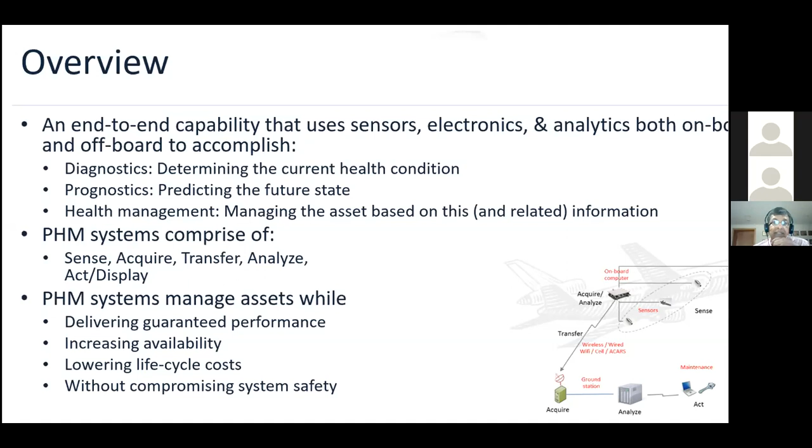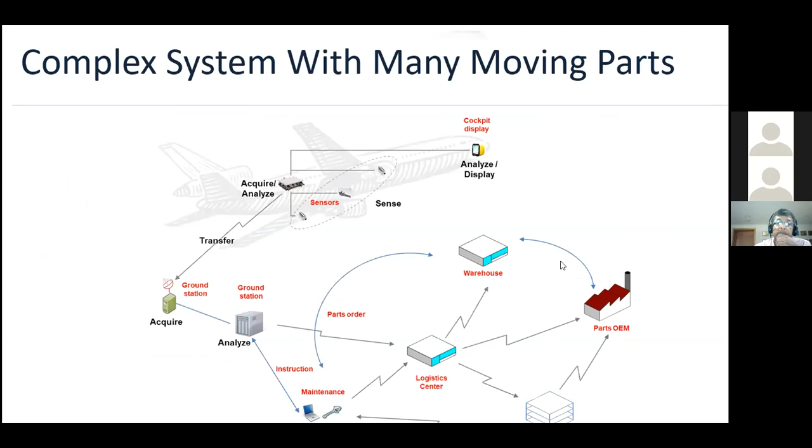As you all know, aerospace infrastructure, the ecosystem is very complex. You have not just the flying asset, but you also have an entire infrastructure and enterprise that backs it up. So the PHM model lies within this bigger system that actually supplies parts, supplies information, analyzes information. There's the logistics associated with it, there's engineering associated with it, etc.

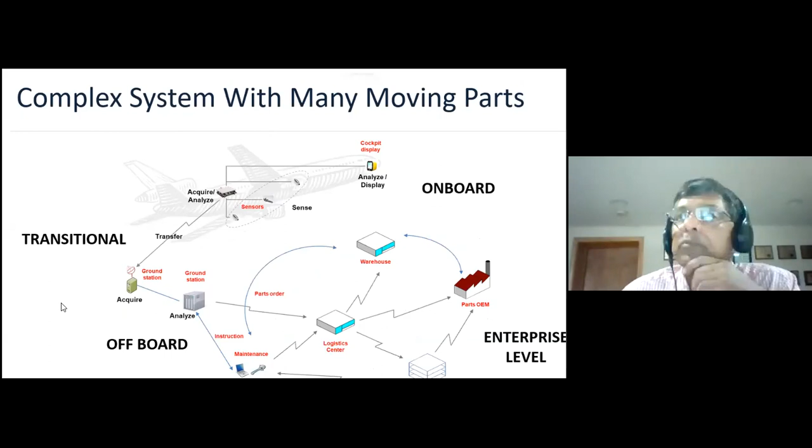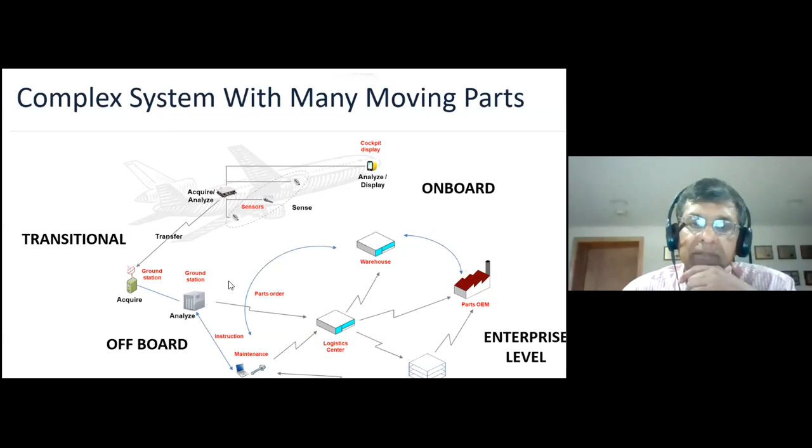So there are several pieces of this, as I mentioned. There's the onboard piece, there is the transfer piece, and that's becoming more and more important these days, especially with cybersecurity and other things that are influencing not just the aerospace sector, but the entire mobility sector. There is the offboard piece, where the transitional information gets downloaded, and then you do things on the ground. And then based on the actions, there is this entire enterprise level, the functions associated with the enterprise.

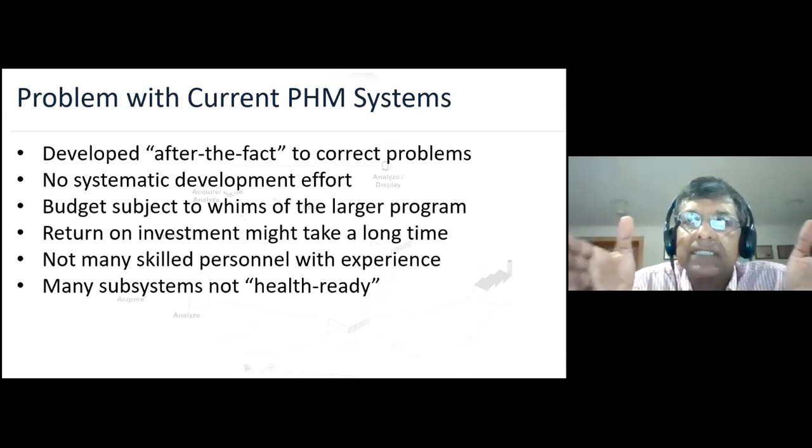What are some of the problems with the current PHM system? It's not typically part of the normal engineering design process. It's part of after the fact to correct the problems. I know a lot of you have experienced this, especially if you're in this field. And therefore, because of this, there's no systematic development effort upfront. A lot of it is after the fact.

Budgets always get cut when the larger program runs out of funds. The ROI on this takes much longer than for a normal aircraft. An aircraft program takes a long time anyway to make money, but the PHM systems takes even longer. And while this is no longer that true, there aren't people who are actually trained in the discipline of PHM. That's changing, but not fast enough, I think.

And systems are not health ready. In other words, they are not designed from the beginning to be installed in a PHM ecosystem.

Well, part of the solution to this, obviously systems engineering is a big part of it, but also a dedicated team, protected budgets, shorter term off-ramps. In other words, you want wins that don't take 35 years to get realized. And again, I must emphasize that training is a big part of this. And standards is another thing which I've been involved in a lot, which also comes into making PHM a success.

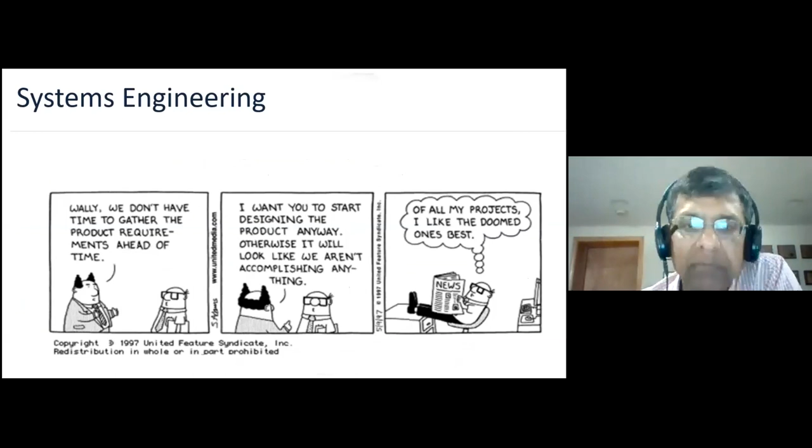So how does the systems engineering part of it work? You've seen this cartoon, I'm sure. Essentially, we all know, and since you are all members of INCOSE, you do know that systems engineering is a big part of it and is a big important part of any design process. That's no different for PHM.

The costs obviously go up exponentially if you have to make changes in a program down the road. That is true of any major program. It's certainly true of programs that involve aerospace, for sure.

And I don't know if there was a PhD thesis in Australia, I'm forgetting the name of the author, who actually did an analysis and figured out that if you spend about 15% of the budget in a program on systems engineering activities, the reduction in cost and schedule is fairly significant. So that's something that obviously you won't do it for a 2-week project, but a major project, if you fund it properly, you're going to get a better return on investment.

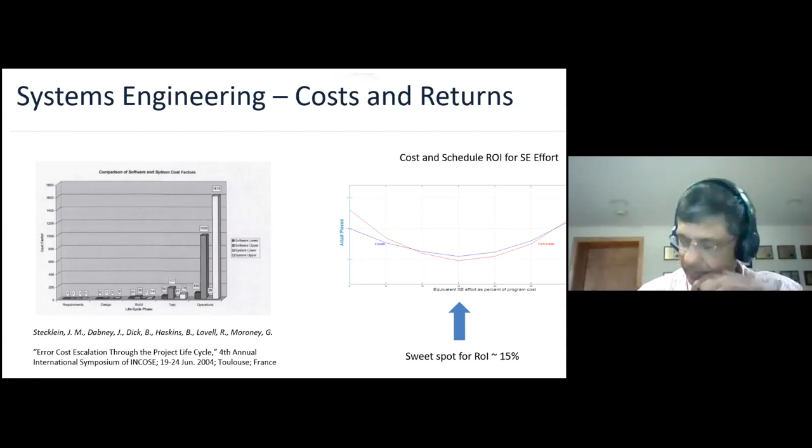Okay, I'll give you, at least to motivate this, an example of where the lack of a systematic approach to the design of PHM systems actually came back to bite an OEM. So there was a problem in a certain aircraft engine company's engines, where there was a problem with the fan blade retention. I won't go into details.

So there was a retention problem of the fan blade, and one of the issues was that it would come loose, and they realized that they had a vibration system in place that would give very clear indication of the fan blade coming loose early if you analyze the system. So you could take the vibration information, you could download it, analyze it, and trend it, and it was very clear that you could pick up this problem.

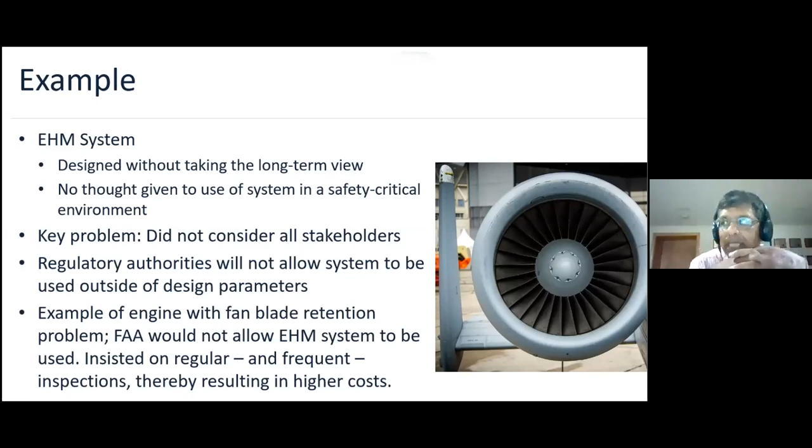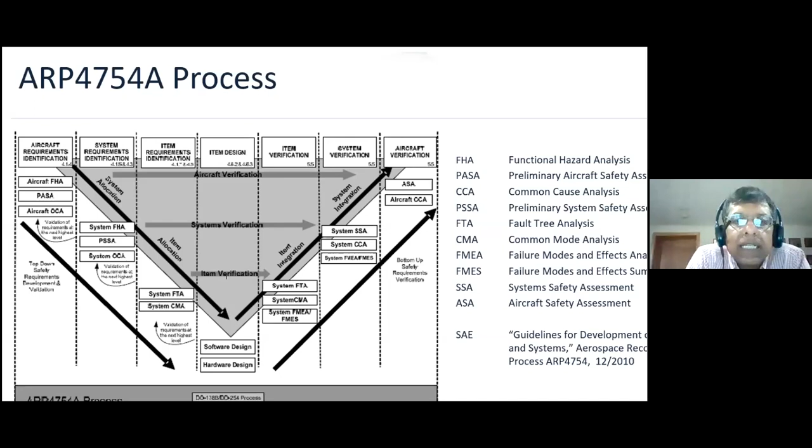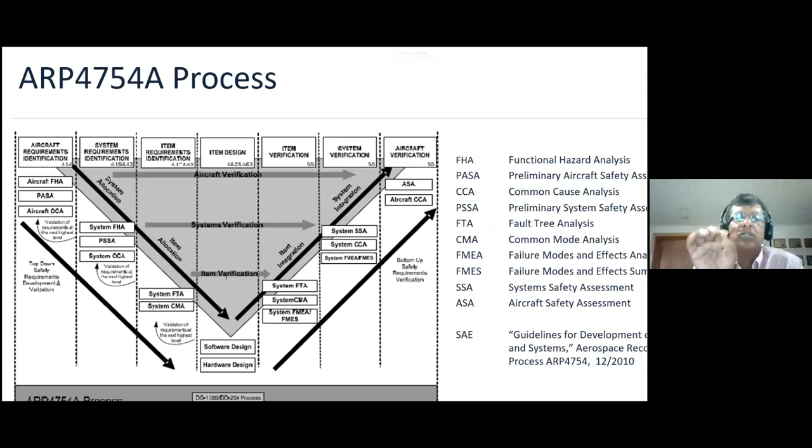A lot of you are aware of the ARP 4754 process, which is the systematic systems engineering approach that has been translated to the aircraft certification world. What we are trying to do within the PHM discipline is adapt our systems to this overall process. There are certain key differences between the two. One obvious one is that ARP 4754 is only for airborne systems, whereas what we design is very much an end-to-end process that involves onboard components as well as off-board components. So we have to adapt the system to our discipline and programs, but within the context of this kind of systems engineering process.

So one of the applications of systems engineering to PHM, as Partha mentioned a little in the beginning, is the cost benefit analysis. This is key in every program I've been involved in. Some of you may be part of UTC, or now Raytheon. A major program when I was at Pratt & Whitney was the geared turbofan, and I'm quite proud to say that using a fairly validated cost benefit analysis, we managed to get EHM, engine health management, into the geared turbofan from the very beginning. That's an extremely important part of this. People don't believe that PHM makes you any money, so you have to be really careful about this.

Obviously the rest of it you know very well: requirements management, architecture definitions—I'll go through some examples relating to PHM. Model-based design is a huge part of PHM these days; almost everything we do today is model-based. Associated with that is model-based analytical verification and validation as well. The key to PHM is really how it integrates with the MRO, maintenance, repair, and overhaul business. That's the only place you can make money with this. So I'll talk a little about where we are going with this in the near future.

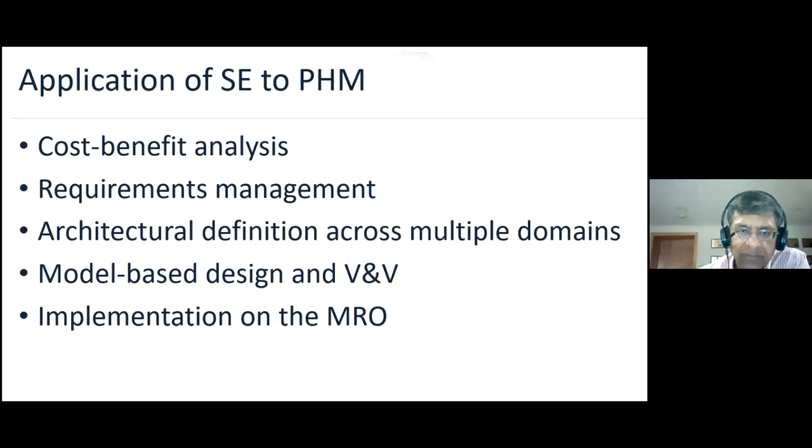Requirements—this is interesting. You all know that requirements flow down from higher level objectives, right? That's what we've all been taught within our systems engineering discipline. In this case, this has been pulled straight from the JSF, Joint Strike Fighter, requirements document—or rather, this is not a requirements document, this is the very high level needs statement: affordability, redundancy, and keeping the same level of safety.

I don't know if you know what the JSF is. The Joint Strike Fighter is the 5th generation fighter replacement for a twin engine fighter, which is sort of the F-22. The F-35 was single engine, and the requirement was that it would maintain the same level of safety as something with 2 engines, which is huge. So having a single engine aircraft, the PHM system was a basic requirement for obtaining the same level of safety as the F-22.

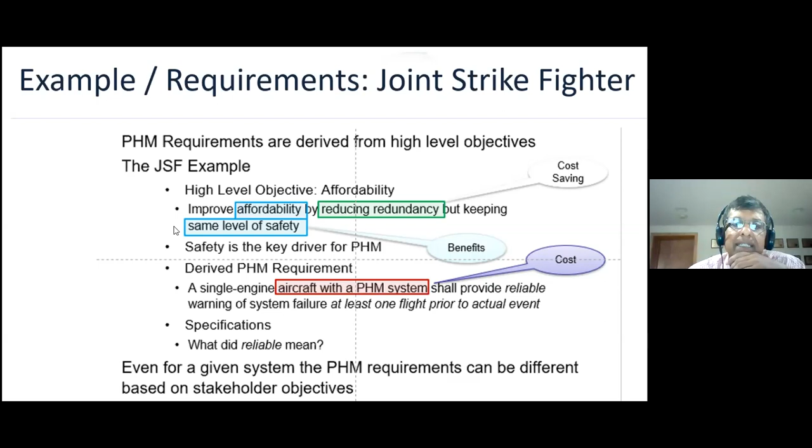So that's how you derive requirements from higher level needs statements that, on the face of it, you don't realize are there. Given this, you really don't see where the PHM comes in. But thanks to some leadership within NAVAIR, a lot of PHM functions came about from the JSF because of this need. So that's just an example of how requirements get derived from the needs statement.

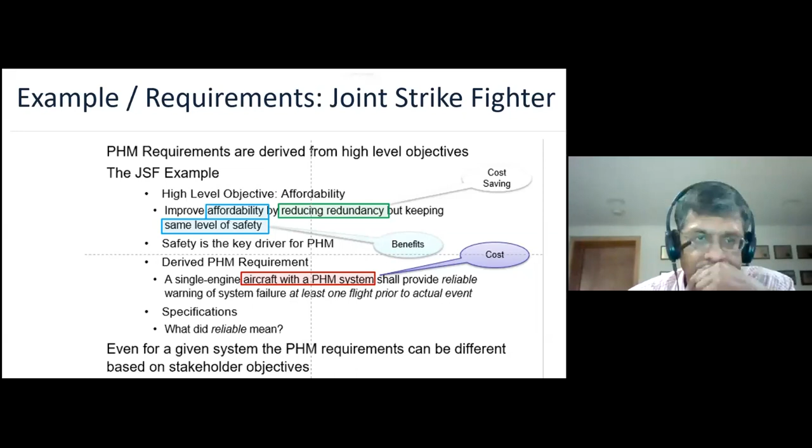I talked about the OSA CBM model, which is on the left, and the SATAA model, which I described—sense, acquire, transfer, analyze, and act. I don't know if you know what the OSA CBM model is. Obviously, CBM is condition-based maintenance.

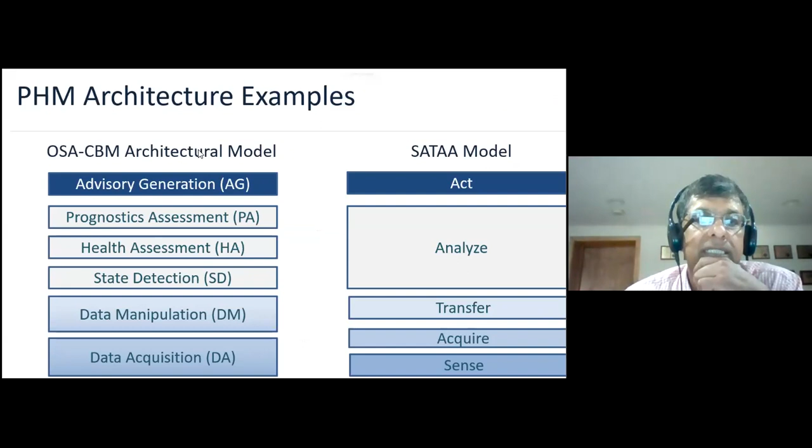Open system architecture's condition-based maintenance architectural model, this is by Mimosa, that was started by the US Navy along with, I think, Collins or Hamilton Sundstrand was a big part of that. Nobody knows what Hamilton Sundstrand is anymore.

Anyway, so they have this 6-level model: data acquisition, data manipulation, state detection, health assessment, prognostics assessment, and advisory generation, which lines up, well, it doesn't quite line up with our 5-state model, but you can see some parallels between the two. This is an architecture of the PHM system that we use pretty much on all our documents, the documents that Partha was talking about within the ARPs that the SAE aerospace sector has been developing.

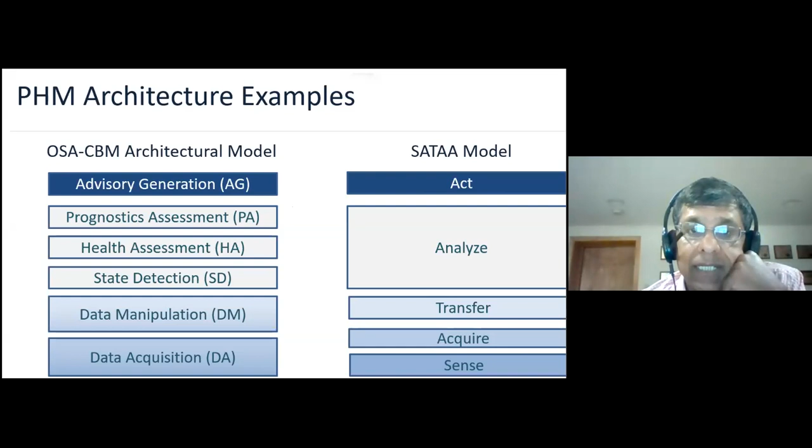I talked a lot about model-based design. Gas path analysis is a key part of engine health management. I talked to you about the geared turbofan. This is a key component of that.

So what a model-based design system for engine health management consists of is, if you have identified these physical problems like erosion, corrosion, fouling, etc., what happens because of that is it results in degraded component performance. The way we assign those performances in the gas turbine is essentially by two major factors: efficiencies and flow capacities, which essentially means it's the area of the flow within the turbine.

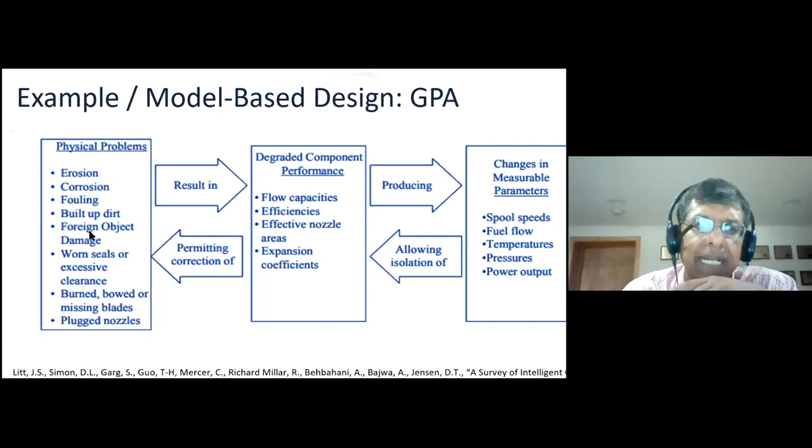And what the degraded component performance does is produce some changes in measurable parameters. This is what you're sensing. So everything we do within diagnostics or PHM is an inverse problem. Taking the measured parameters and analyzing it using model-based means allows us to estimate the degraded performance characteristics. And from that, and from the signatures associated with that, you can actually do the correction to the problem. You can identify and correct the problems.

And a lot of work has been done on this by NASA Glenn Research Center, GRC, and Don Simon is one of the leading players in this area.

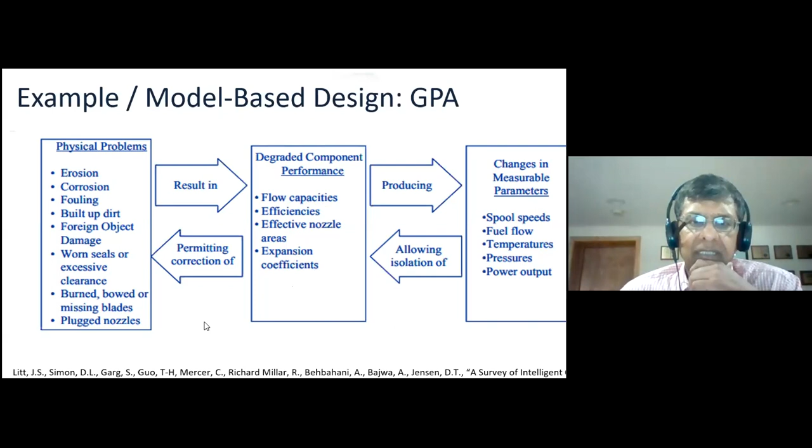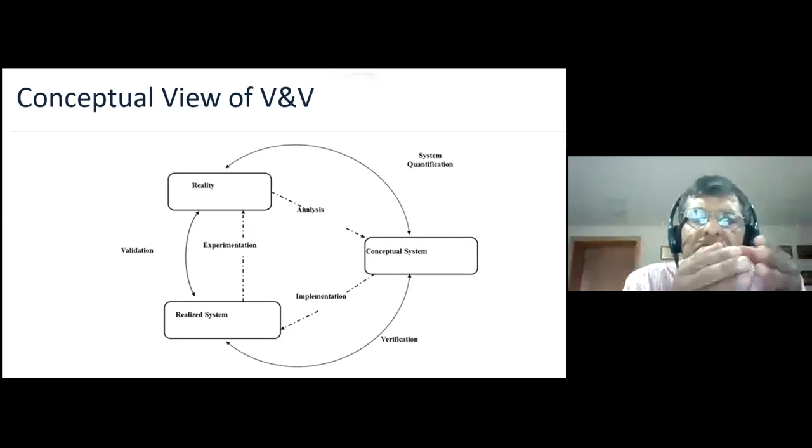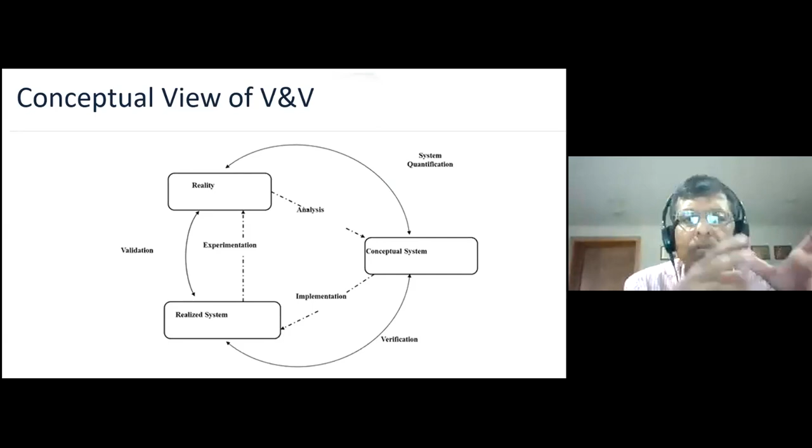I wouldn't bore you with verification and validation. I think that's important, but the only thing I would say is model-based validation of requirements is becoming a big deal. In the PHM world, validation becomes very difficult. If I tell you that I will save you 20% in your life cycle costs, you're not going to wait 30 years to realize that. You have to do it with model-based design or model-based simulation, or some means of doing it analytically. That's the key, that's the only thing I want to comment here.

And then I think what is important for us is to see what the future of this is. Systems are becoming more complex, clearly. And as you all know, systems engineering is an absolutely essential part of developing a complex system.

PHM, by its very nature, is interdisciplinary. It cuts across all the disciplines within, well, in our case, aerospace engineering, but it's the same thing for mobility, automobile, or any other, even manufacturing. A lathe has interdisciplinary aspects, maybe not as complex as an aerospace system, but it certainly has electrical, mechanical, and chemical parts of it that have to be taken into consideration.

And past experience will be key to sustaining PHM in the future. In other words, how things have worked in the past will have to be used to validate the future, especially when it comes to cost-benefit analysis.

So what I would like to do is conclude with my vision of where this is going. I think I've got about 10 minutes, and I can finish that in 10 minutes, or maybe even less. And then we'll open it up for questions.

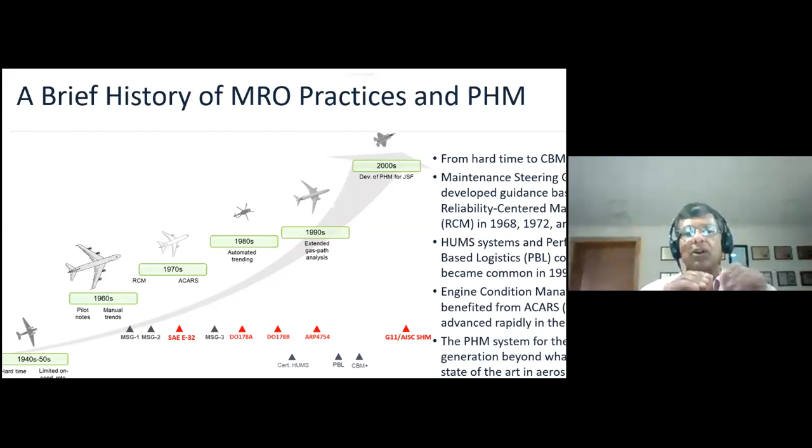So here's, maintenance, repair, and overhaul is kind of where PHM really resides. Why do I say that? Even though it has all aspects of engineering associated with it, it really makes money when you apply it to MRO. It's in the maintenance area that all these analyses, all the algorithms, everything we do ultimately results in maintenance. So it is important to look at the maintenance part of it and then work backwards.

In the commercial aerospace world in the 60s, when the 747 was coming on board, what is now called the Airlines for America group set up the Maintenance Steering Group, MSG, to develop systematic maintenance practices based on reliability centered maintenance. There were 3 versions, called MSG 1, 2, and 3. These were guidance based on reliability centered maintenance, especially for doing maintenance for the 747, and that has evolved over the years.

Every 3 years there's an update on the MSG guidance. The only reason I mention that is we believe that any maintenance related to PHM will have to come in through that MSG process.

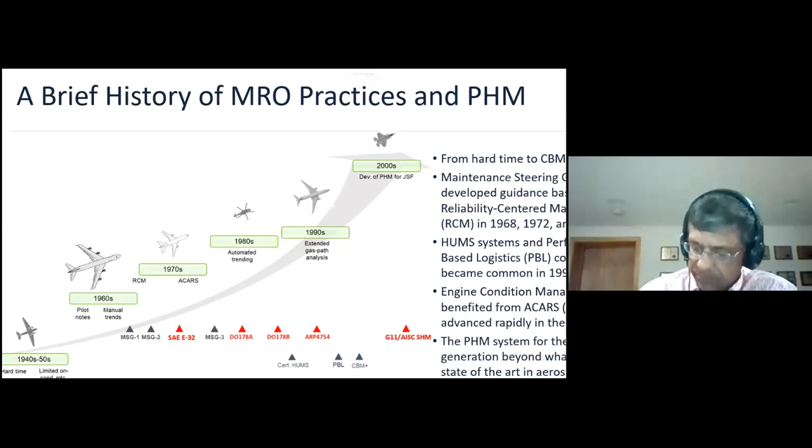What is going to happen in the future? More electric aircraft - there's a huge development, what is now called sort of the fourth revolution in aerospace, which is the electric aircraft, autonomy, urban air mobility. All of these things are coming about. We're going to see huge development through the 20s and into the 30s. I know we've had a bit of a downturn thanks to this COVID crisis, but I don't think that will last. I think it will pick up.

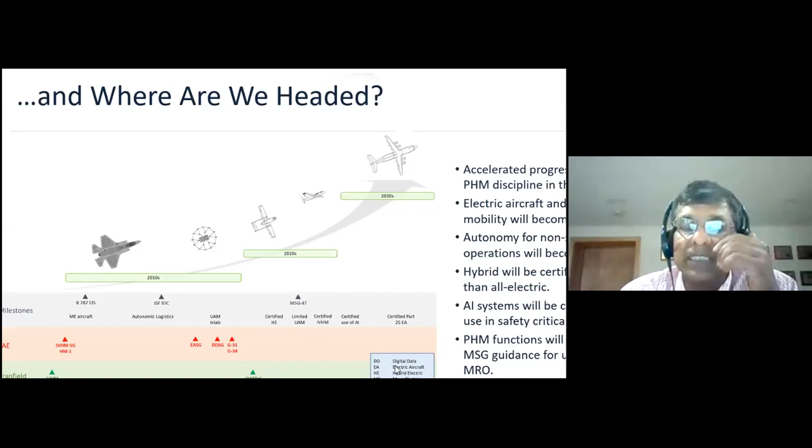It'll be a little slower, but we will get to a certified Part 25, which is a transport big aircraft, by maybe the end of the 30s - that's at least my prediction. We already have a certified small Part 23 electric aircraft today in 2020, so it shouldn't take that long to get to Part 25.

On the SAE side, a lot of work was done at the beginning of this, in 2011, establishing the IVHM steering group, which, by the way, I'm now the chairman of, just starting, and HM1, which is the IVHM technical committee. I think some of you are working on some documents. I know Partha and Prasanna are related to HM1, so that's fantastic.

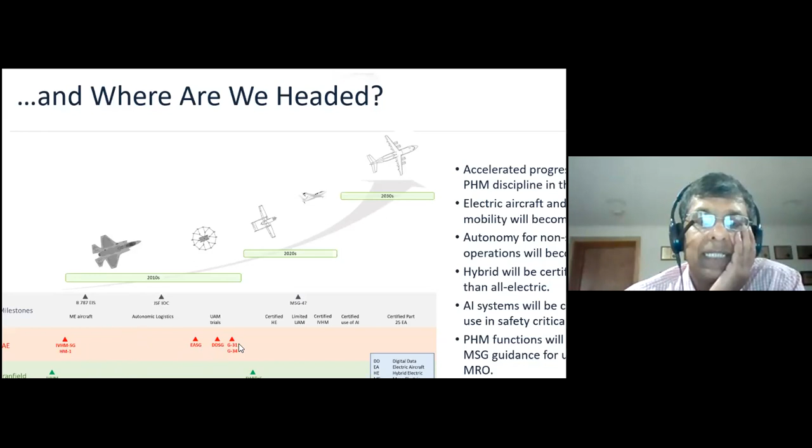I need more people from the Indian aerospace community to join this. Ravi Kumar from Infosys has been doing a lot of work, and it will be great if more people join in. The electric aircraft steering group came about in the last decade. There's also the Digital and Data steering group, G31 and G34. G31 is electronic transactions in aerospace, and Ravi Kumar is actually the vice chair of that group. One very exciting new development within aerospace is G34, the technical committee working on AI in aerospace - artificial intelligence in aerospace.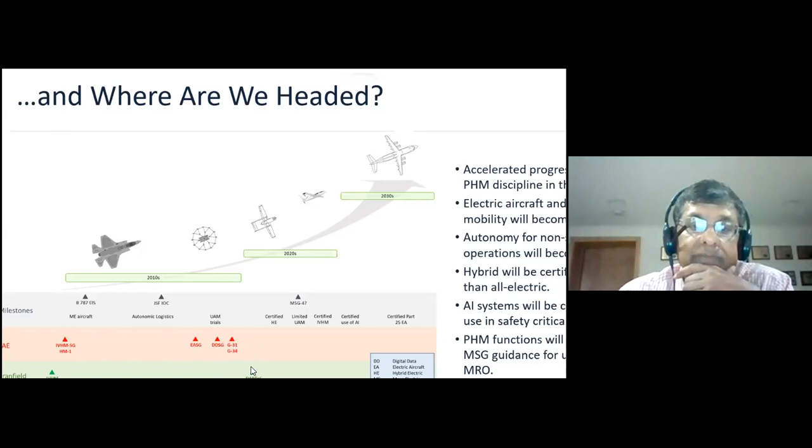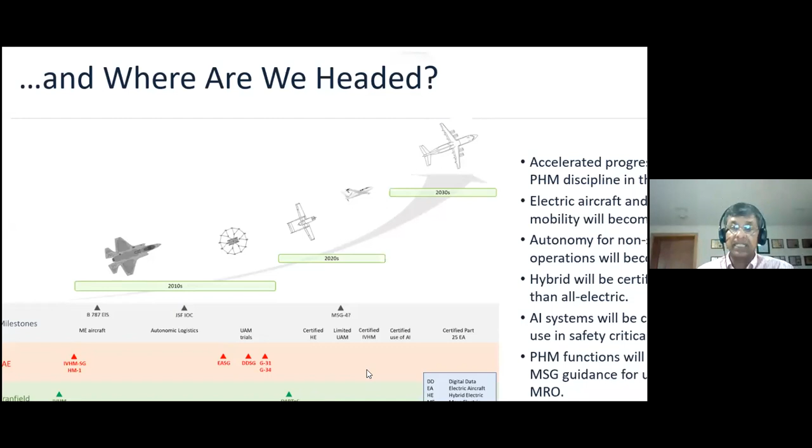That's pretty exciting new development, so I'm happy to be part of that, and I'm sure you're going to hear a lot more about that. Cranfield University has been doing a lot in this area. They set up the IVHM Center in 2009, and now they're setting up the Digital Aviation Technology Center there to work on digital issues related to aerospace, which I think is the future for us. One of the things is how do you get PHM into the MRO.

The maintenance infrastructure? You do it through what are known as maintenance credits. If you look at the definition of maintenance credits within the aerospace context, it is approving a new or modifying an existing maintenance procedure using IVHM or PHM technology in such a way as to save costs without compromising continued airworthiness. It's not earth-shattering what we are trying to say here.

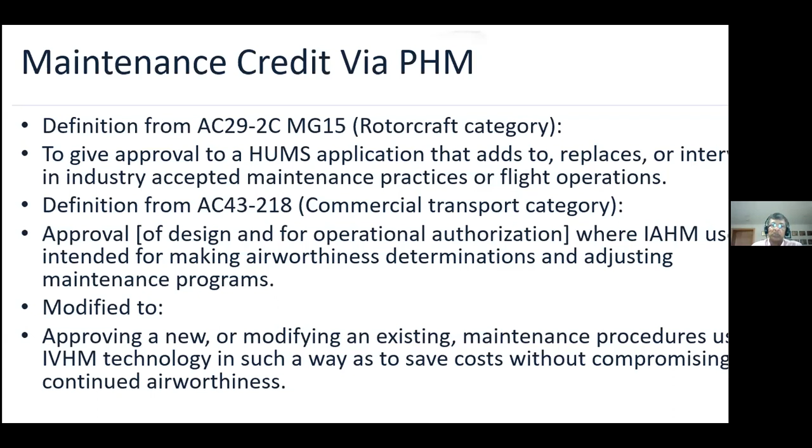Essentially, what we are saying is you look at an existing maintenance procedure, and by the use of IVHM or PHM technology, if you can change it—say you lengthen the inspection interval, or you eliminate a specific procedure—so that you save costs without in any way compromising airworthiness, that's essentially earning maintenance credits for your procedure. That's how we, I believe, go about getting PHM into the aerospace world officially.

There are certain things that are already earning maintenance credits, like vibration monitoring, takeoff EGT margin—EGT is exhaust gas temperature margin monitoring, which is related to ETOPS, twin engine operation. Oil debris monitoring, and a few rotorcraft safety critical parts like main hub rotor, and also the gearbox, are under certain limited maintenance credits programs, not all though.

SHM, the AISC SHM group that I was talking about, is doing a lot in this area, and they're working with the MSG group to do it. In the future, brakes and tires, batteries, APUs, landing gear components—all of them will be attacked or addressed through the maintenance credits procedure. I think that's the key to getting PHM to make a difference in the MRO world.

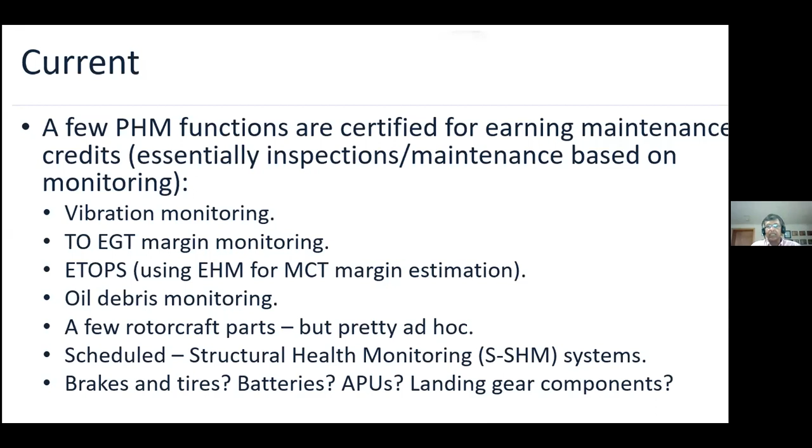This is kind of the process for getting this into the MRO world, and I'll give you a very brief overview of what happens. The maintenance review board, composed of authorities—FAA, EASA, DGCA, etc.—operators and OEM, they get together and figure out how a maintenance program is essentially established.

That goes into the maintenance review board report, which starts the maintenance plan, which then goes to the OEM that develops the maintenance planning document. And then they hand that over, along with the aircraft, the asset, to the operators, who then come up with the detailed maintenance manuals—a big document that actually tells you which bolt to go unscrew to actually get to the problem. And then once problems are found during operations, that goes back and modifies this. So that's how you get engineering changes, etc.

So this loop is complete. And then there is this International Maintenance Review Board Policy Board, which keeps looking at this process and develops procedures for the rest of the world. Now, DGCA is not part of this yet—I don't know why—however, they do take guidance from them down the road. So I'm hoping that India becomes part of this process in the future.

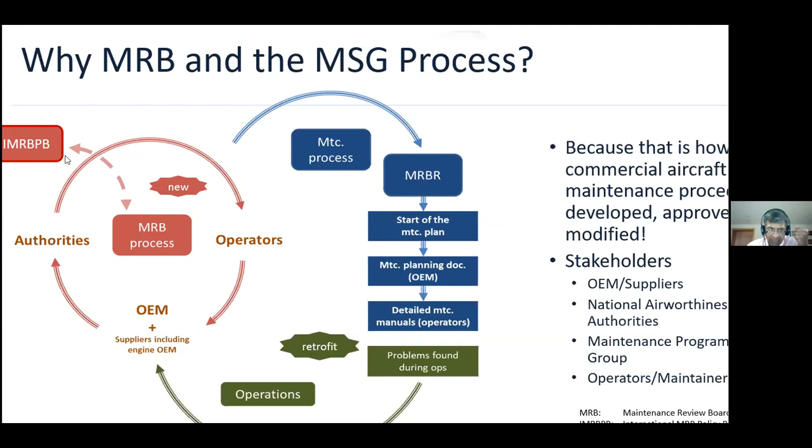I talked to you about systems engineering being critical to a multidisciplinary process such as PHM. About 15% of the budget, if it goes into this for a big project, really brings dividends. Certainly the Defense Department within the US, and I'm sure that is true of India as well, will not undertake a major program without well established systems engineering. Standards are extremely critical, and I know some of you know that.

To conclude, I would say that the only way to get PHM to make a difference is through this maintenance credits process. That's the clear way of doing it, and we are working towards that. Certainly, if you guys are interested, just let me know and we will include you in the process. Thank you, I guess I'm open to questions.

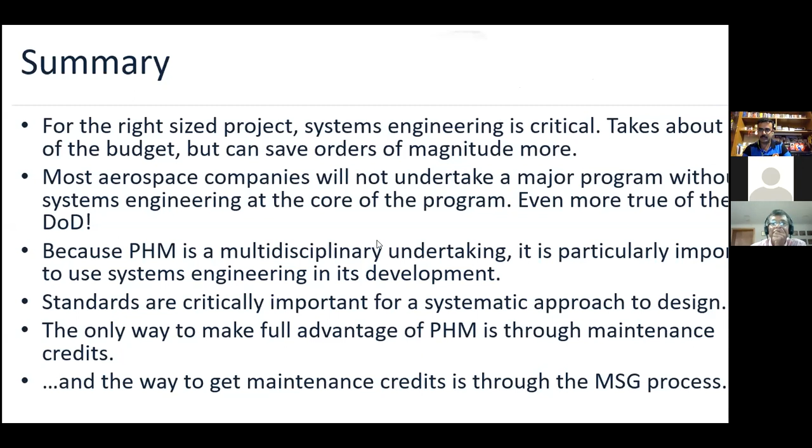We have a lot of questions already flown in. We'll try to cover as many as possible within the time available. So the first question is, what are the enabling disciplines other than systems engineering that are a must for one to develop in this PHM field?

For me, I think it's really modeling. I believe fundamental mechanical engineering, electrical engineering - why electrical? Because these days there are electronic components. If you can model an IGBT, that's a fantastic thing, other than modeling a gas path for a gas turbine. So fundamental engineering, aerospace engineering, is a key part on the aerospace side. For manufacturing, there are other systems. You cannot get around fundamental engineering - I think we lack that. We jump into software all the time. Clearly software is important, don't get me wrong, but I think fundamental engineering is more important than anything else.

The next question is, what is the progress of PHM in automobile as per your experience? A good question. The OBD system, the onboard diagnostic system, number 2 now I guess version 2, is

something that was actually instituted for emissions monitoring. But because it allowed you to put in algorithms, put in monitors, have a communication to the outside world, it became somewhat a means of doing prognostics. GM and others, through the OnStar process, which is a satellite link, have managed to put more diagnostics into their cars. We've seen some battery management for electric cars, and clearly Tesla and other companies have done a lot with prognostics. But in terms of hardcore PHM, I think the aerospace industry is far ahead in terms of analytics. The good thing about automobiles is it's not as safety critical, so implementing PHM on automobiles is a little easier. I don't know what's going to happen in the future - I think it's going to probably overtake aerospace in terms of the kind of smarts put into it. So yeah, it's an interesting world, that's for sure.

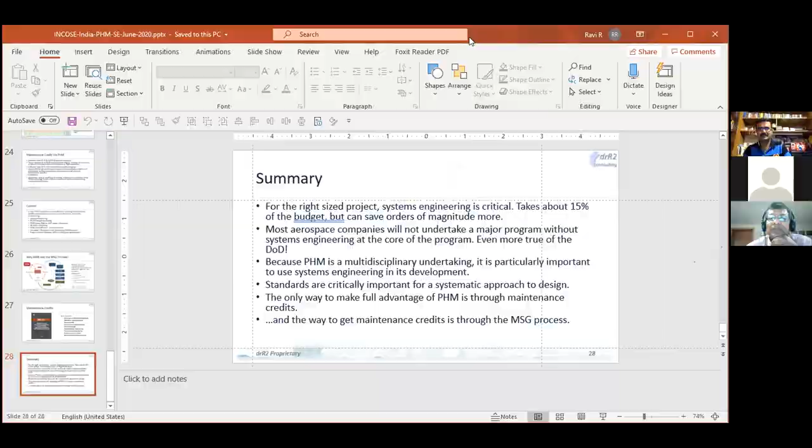All right, I'm going to sign off now. Yeah, thank you, thank you, bye Ravi. Bye, yeah, bye, thanks Prasanna. Thanks Partha, thanks, yeah, bye. Oh yeah, we can see Partha finally. Hello, he has a helper as well.